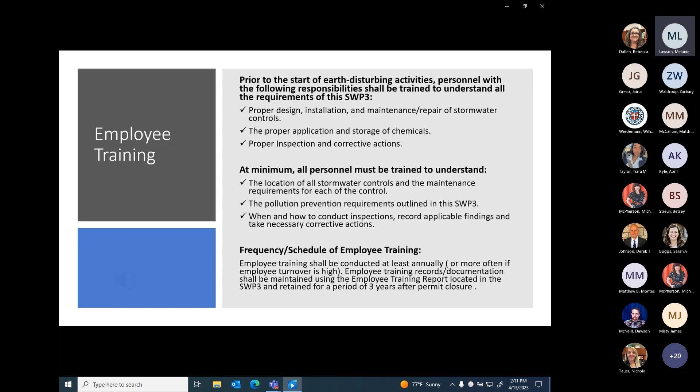Next, let's discuss contractor certification. In the next couple of slides, we'll talk about the contractor certification form and how it's used to ensure that all parties outside of the permit holder will be responsible to adhere to the SWIP.

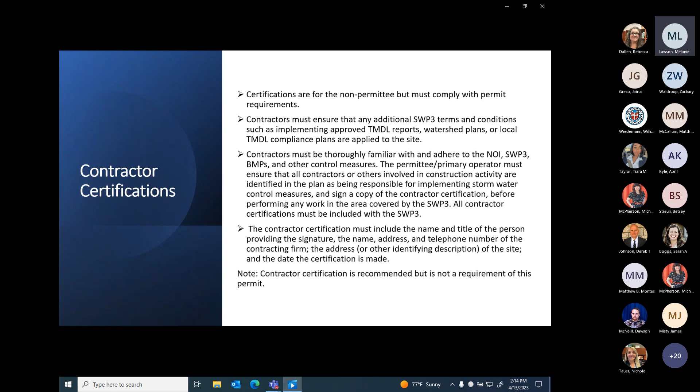Now that we've gotten through employee training and contractor certifications, let's get into completing a site inspection report.

Performing regular site inspections comprises not only inspecting your job site to ensure permit and SWIP compliance, but also checking all job-specific documentation and ensuring that it's up to date with the current site conditions. Doing so will help mitigate and correct any potential flaws in the stormwater controls, the job site itself, and your documents.

The inspection report is designed to be customized according to the BMPs and conditions at your site. To make your site inspection easier, you should bring a copy of your site plan and number all the stormwater BMPs and areas of your site that will be inspected. A brief description of the BMP or area should then be listed in the site-specific section of the inspection report.

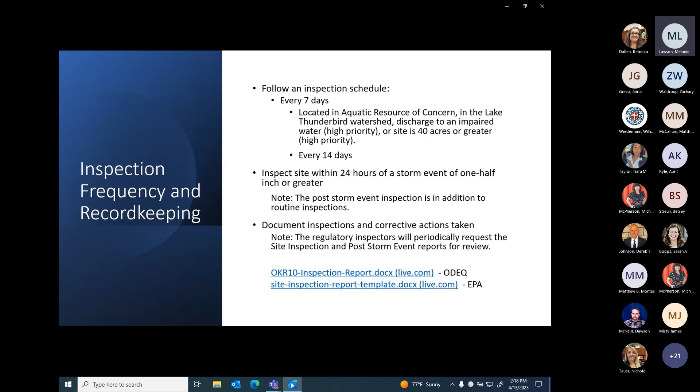Step 1: Completing a site inspection report. When filling out the first step of your site inspection report, please ensure that each blank is filled in correctly and legibly. This is the information you'll need for the general information section: the project name, inspector name and information, inspection frequency, the current weather information, and discharge information. Now let's see how that fits into the form.

Always starting at the top of the form and working your way down will ensure that no blank is missed. The inspection date should always be the date that the inspection was performed. Site inspections can rapidly change, so it's important to keep consistency throughout the inspection process.

Record the complete project name. This is especially important if you have multiple phases of the same project going on at the same time.

The person performing the inspection should list his or her name, phone number, and email address. The email address is especially important in terms of communication because all Oklahoma City stormwater inspectors will be emailing reports and photos of your site directly to your stormwater inspector.

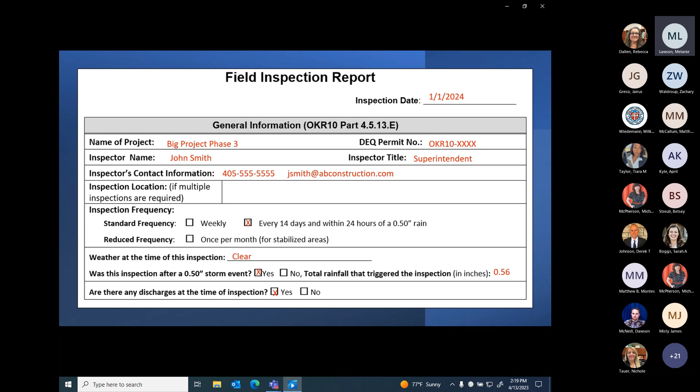General information, key points. Here are some key points to take away from the information thus far. Your site inspections should be conducted in accordance with one of the 2 schedules listed below.

At least once every 7 calendar days for high priority, TMDL, or aquatic resources of concern, or at least once every 14 calendar days. Regardless of which inspection frequency you choose to schedule, an additional stormwater inspection must be performed if a storm event produces half an inch or more precipitation.

The permit holder must specify which inspection schedule he or she will implement in the SWPPP. Remember, post-rain event storm reports are in addition to the routine inspection reports, and always complete all data fields and write legibly.

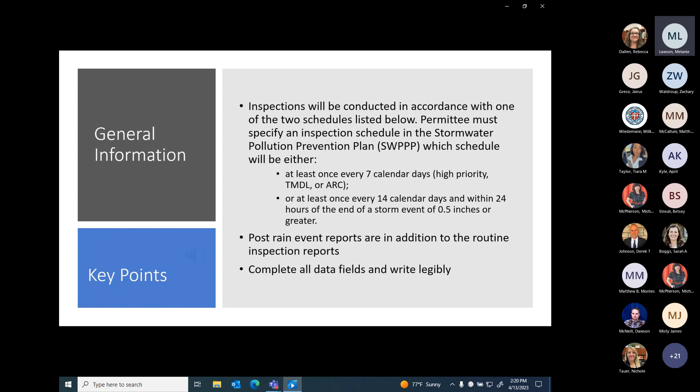Step 2. Completing a site inspection report. Stabilization of exposed soil.

List the areas where soil stabilization is required to begin because construction work in that area has permanently or temporarily stopped. Non-disturbance greater than 14 days, or 7 days for TMDL, high priority, or ARC areas. Also record all areas where stabilization has been implemented.

Soil stabilization is extremely important to be done in a timely manner, as the potential to release large amounts of sediment into the streets, storm drains, and neighboring properties is extremely high, especially with unvegetated slopes.

Vegetation is the absolute best sediment discharge prevention tool at your disposal. It's highly recommended when starting the initial grading process to leave as much natural vegetation as possible. The more rooted vegetation you have, the less sediment discharge you'll have.

These releases may not seem like much at first, but over time they can drastically change the topography of your job site, negatively change the chemistry in water bodies, affect local wildlife, pose challenges to local water treatments, and severely damage the environment. Out of all the potential pollutants during a construction job, sediment is the number one pollutant.

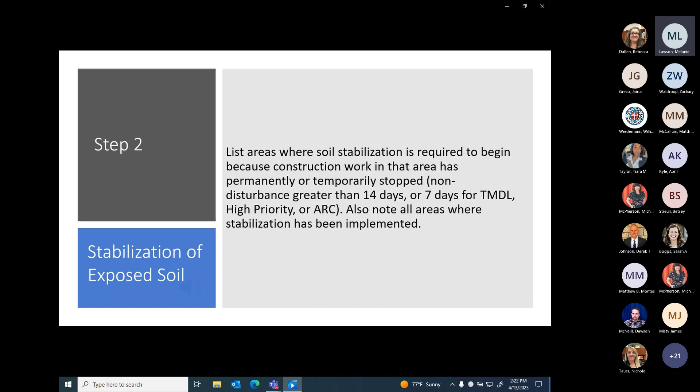This is the form you'll use to record stabilization. For each area where stabilization has been initiated, describe the progress that has been made and what additional actions are necessary to complete stabilization.

Record your stabilization dates of when stabilization will begin, when additional stabilization will occur, and when final stabilization has been achieved.

When major construction activities are complete on a part of the job site and final stabilization for that portion has been documented and completed, inspection frequency may be reduced to monthly in the stabilized area.

Permit holders can amend or add to this section as the areas of the project are finally stabilized. Your site plan should be updated regularly to indicate these changes.

Once you're finished with a project and ready to file for a notice of termination, you must have all bare areas stabilized to 70% uniform coverage of the native background, and all stormwater discharge from construction activity must be eliminated.

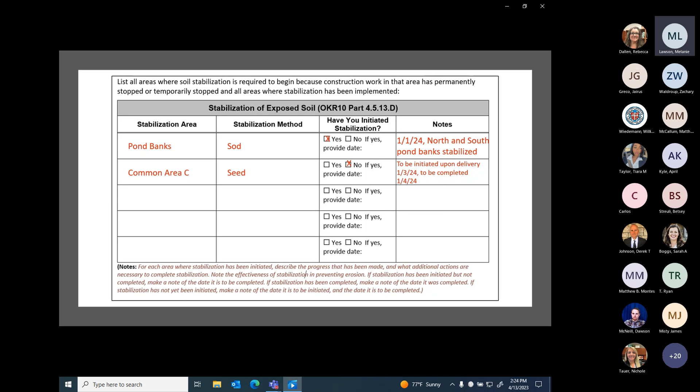Stabilization examples. In the following photos, you can see some temporary and permanent stabilization measures being used. An important note is that all stabilization measures will require regular maintenance until vegetation has been completely established and is root bound.

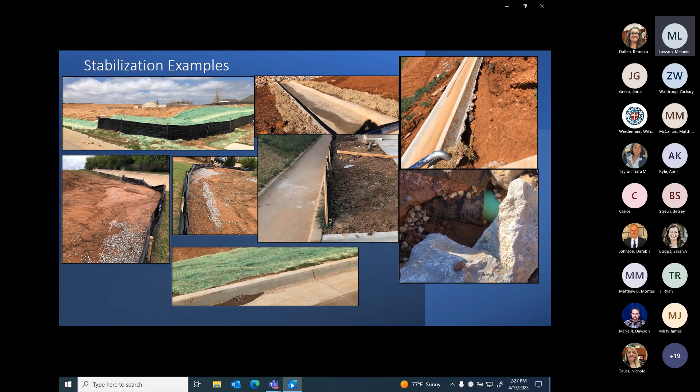Stabilization methods and BMP importance. Key points. Here are some key points to take away thus far. One, be aware of your limits of disturbance. All bare areas that have been graded or disturbed during the project will require vegetative stabilization regardless of property lines or limits of disturbance indicated on the project plans.

Two, implementation and maintenance of controls is required until final stabilization. Three, if seeding, vegetation will have to be established and reach a 70% density. Four, when stabilizing, focus on sloped areas first, as this is a major contributor to soil discharge.

Again, Oklahoma City stormwater will require all disturbed areas, regardless of property lines or limits of disturbance, to be permanently stabilized if it was disturbed during the construction process. Also, if your job site has been stabilized properly and then utilities are installed, it's still the permit holder's responsibility to have those areas stabilized. These will be considered support construction activities for your job site and therefore part of the construction process.

So schedule and speak with your contractors regularly. This is where contractor certifications can come in handy.

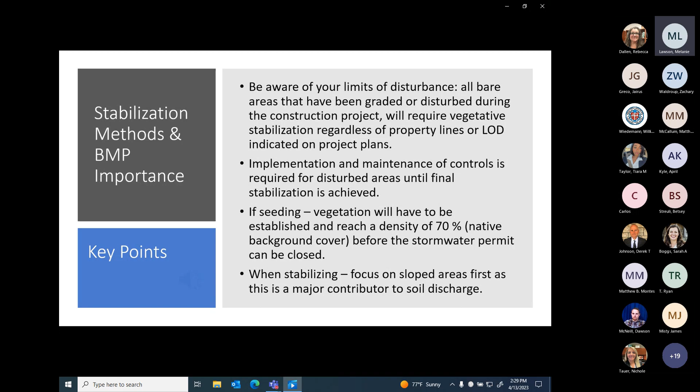Jairus. Now let's move on to step 3 of the site inspection report. In this section of the report, you'll provide a list and description of all structural and non-structural BMPs that are indicated in the SWPPP. You'll identify the location of each control, and during inspection identify whether the controls are installed and operating properly, or if any corrective action is necessary.

You'll provide the date in which the identified condition triggered the need for any maintenance or corrective actions, and in the notes section, describe the specifics about the problem. For this step, you want to take your site erosion control plan and update as needed, depending on what is observed on site. Let's discuss the differences in structural and non-structural controls.

Non-structural BMPs or controls are typically passive or programmatic and tend to be a source control or pollution prevention BMP that reduce pollution in runoff by reducing the opportunity for stormwater runoff to be exposed to the pollutants in the first place. In many circumstances, it may be easier and less costly to prevent the pollutants from entering the drainage system rather than to control them at the end of the pipe.

When used properly, non-structural BMPs can be very effective in controlling pollutants and will greatly reduce the need for structural BMPs. In addition, non-structural BMPs tend to be less costly, easier to design and implement.

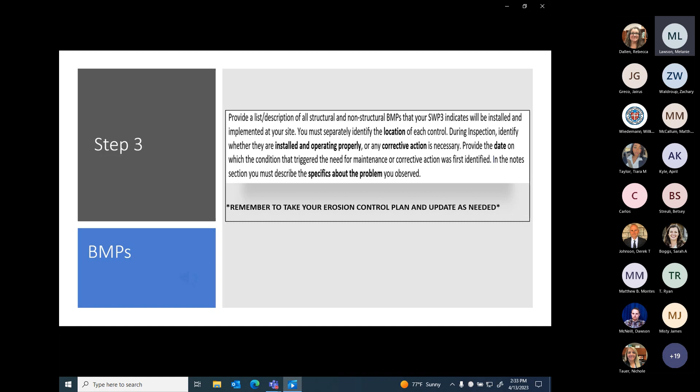Map and erosion control plan. In the previous slide, we mentioned to take your erosion control plan with you during inspection and update it as needed. The erosion control plan should reflect the observed BMPs in place at the site at the time of inspection. It's helpful to number the site BMPs on the erosion control plan to correspond with the site inspection report.

If it's found that the ECP requires updating to add a BMP, simply draw the addition in and date it. The city inspector will periodically check the site erosion control plan to confirm it accurately reflects the BMPs installed on site.

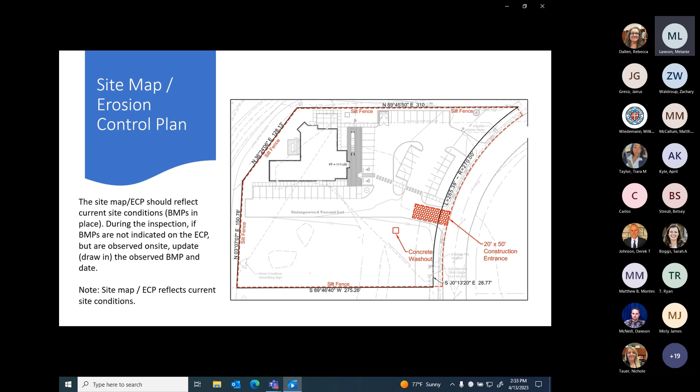The permit does differentiate between conditions requiring repairs and maintenance, and those requiring corrective action. The permit requires maintenance in order to keep controls in an effective operating condition, and requires repairs if controls are not operating as intended. Corrective actions are triggered only for specific, more serious conditions, such as whether a required stormwater control was never installed, was installed incorrectly, or was not installed in accordance with requirements.

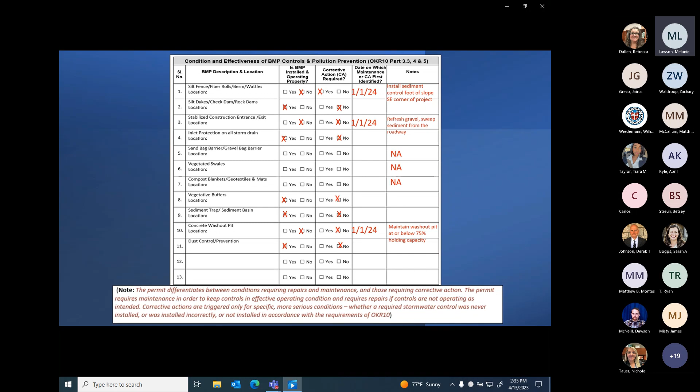BMPs requiring maintenance examples. These are things you might see out in the field while conducting your site inspection report.

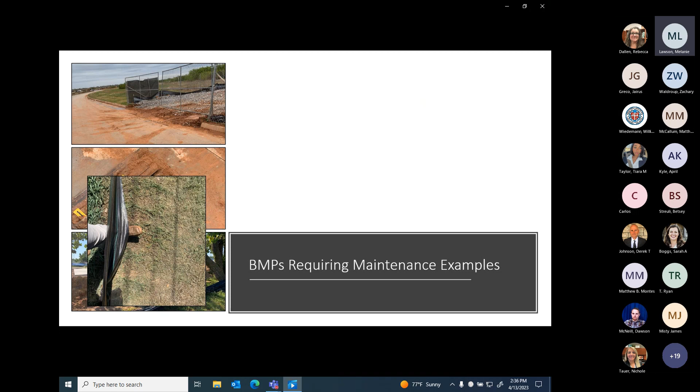In the bottom left, you'll see some silt fence that has fallen down. Often what we find out in the field is silt fence is not trenched in correctly.

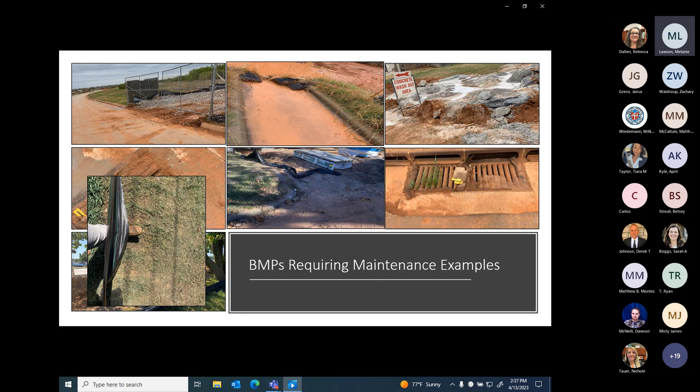Now let's go through some examples of BMPs not requiring maintenance.

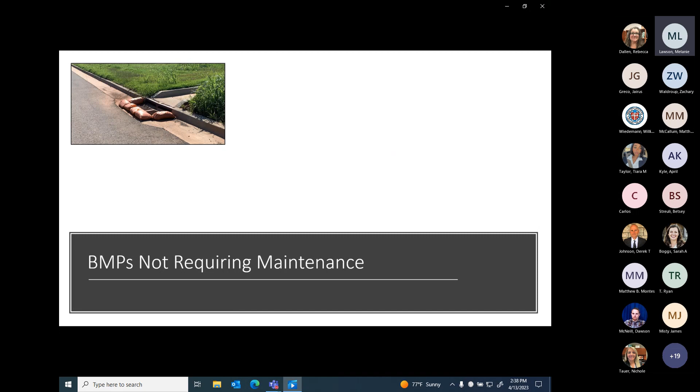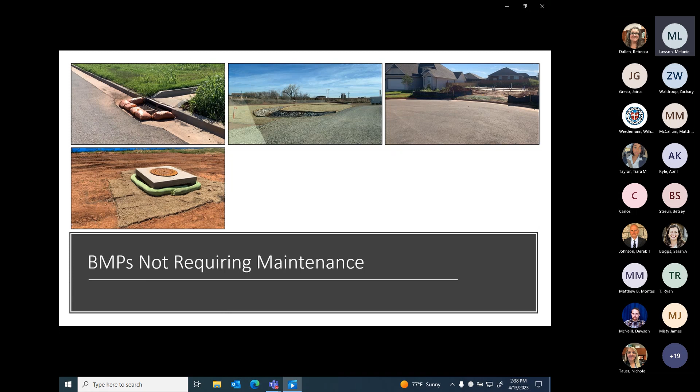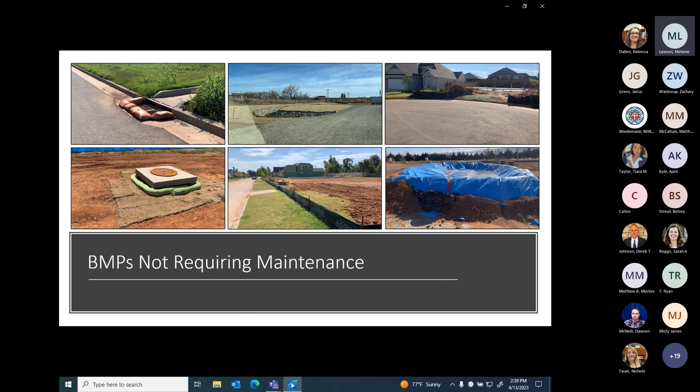BMP key points: Site inspections will verify that all BMPs are implemented, maintained, and effectively operating to minimize erosion, control sediment, and prevent stormwater contamination to the MS4 or the surrounding water bodies.

Note that the permittee shall maintain records of inspections and repairs for a period of at least 3 years after the project is complete and the permit is terminated.

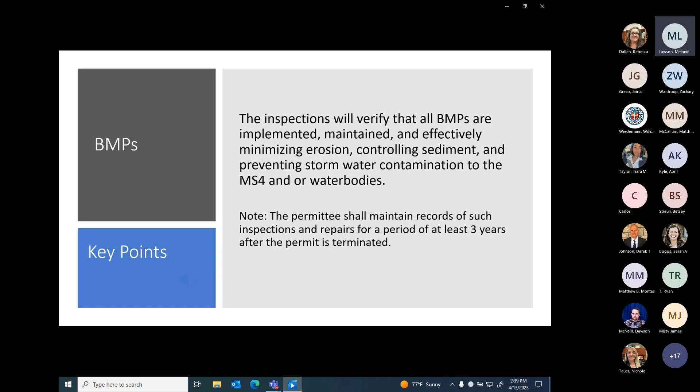Step 4, pollution prevention and waste management. Of the site inspection report, the site inspector will provide responses and possible corrective action descriptions to the pollution prevention and waste management prompt in the far left column.

Let's walk through an example. Is the site free of floatables, litter, and construction debris? No. The action needed here would be to pick up trash throughout the project area.

Are material storage and handling areas, including fueling areas, free of spills and leaks? The response here is yes. If the response is yes, there's no need to document anything in the actions needed column.

Are dumpsters and waste receptacles covered when not in use? The response here is no. If it's no, we're going to provide a reason. The reason here is a cover was not provided. So the corrective action is to use a tarp when the receptacle is not in use.

Has preventative maintenance been conducted on equipment and machinery? Here we say NA because preventative maintenance is not being conducted on machinery and equipment at this site.

Good housekeeping, pollution prevention, and waste management practices, as addressed in this section of the report, is pertinent for each project to maintain stormwater quality permit compliance.

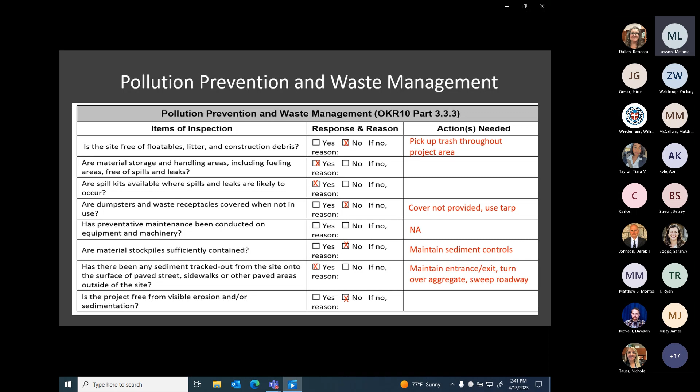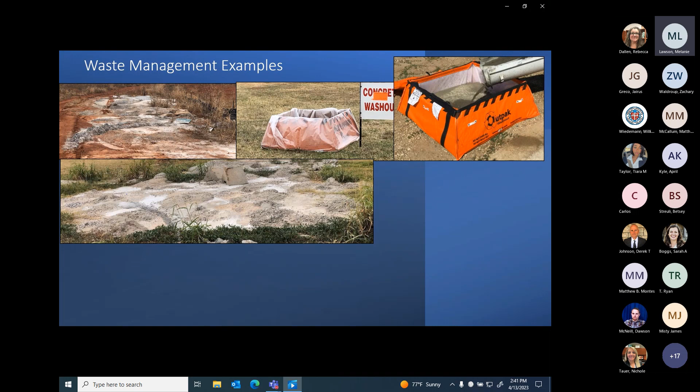Concrete washout is more than just water, rock, and sand. It contains other additives that can shift the overall pH of the mixture to be caustic and can pollute the environment.

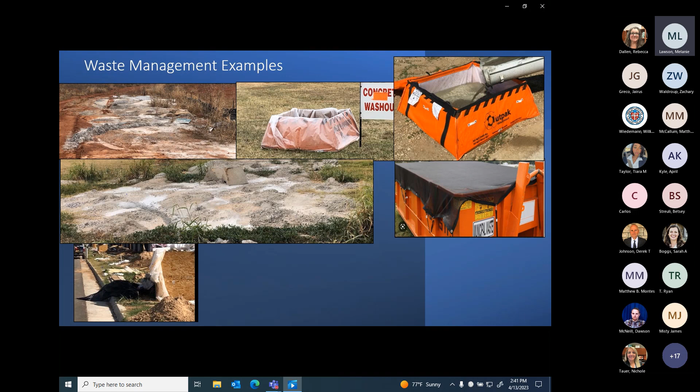Ensure that your portable toilets are properly staked, are in position away from storm inlets and high flow areas, and make sure that your trash receptacles are being covered and emptied regularly.

Pollution prevention and waste management key points. Ensure all chemicals are properly stored in containment or under cover in appropriately labeled containers and that their SDS documents are available for review upon request.

Cover all trash receptacles when they are not in use and empty them regularly. Ensure all concrete washout is directed to a leak-proof container or pit.

Ensure that portable toilets are properly anchored away from stormwater inlets and other high-flow areas. Spill kits should also be available in areas where spills or leaks are likely to occur.

Remember, the permit holder is responsible for all releases of non-stormwater discharges from the job site. So, good housekeeping practices are good pollution prevention practices.

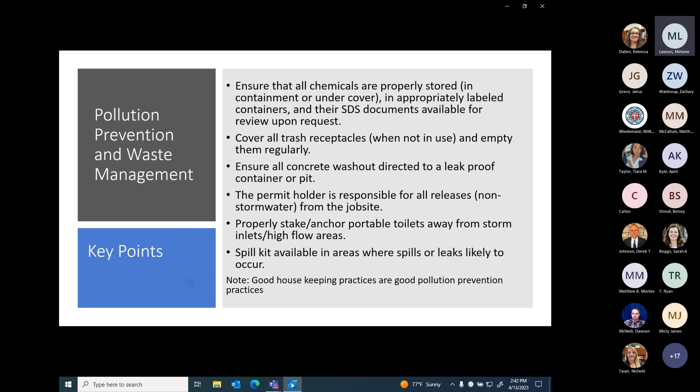Description of discharges. Discharge of stormwater associated with construction activity, as defined in the OKR10 permit, refers to a discharge of pollutants and stormwater runoff from areas where soil disturbing activities, construction material and equipment storage, equipment maintenance, and any other stormwater activity directly related to the construction process are located.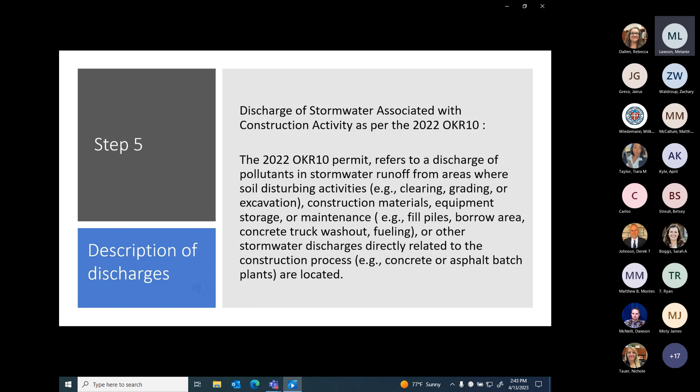The description of discharge section of the site inspection report is to be completed if a discharge is occurring from the site at the time of inspection. Let's walk through this example. The first prompt asks whether stormwater discharge or other discharge was occurring from any part of your site at the time of inspection. If yes, provide the following information for each point of discharge. In our example, the answer is yes.

Number 1 says specify the discharge location. For this example, it was the southeast corner of the project. The next section asks to describe the color of the discharge. Here we indicated that it was dirty and muddy looking, slightly red in color, but it didn't have any foam, odor, or sheen.

If yes, describe, specify the location where the conditions were found and indicate whether modification, maintenance, or corrective action is needed to resolve the issue. In this example, we indicated that we need to install a sediment control on the southeast corner of the project.

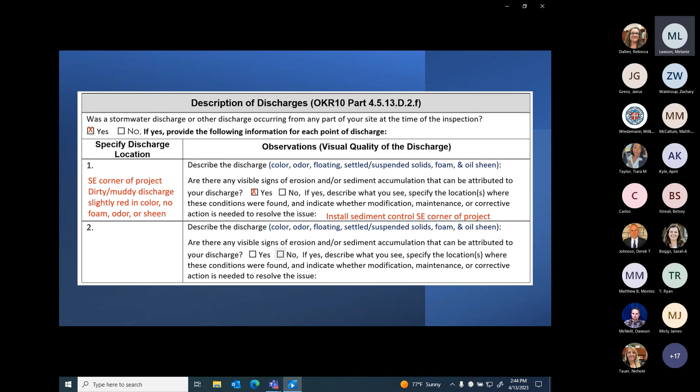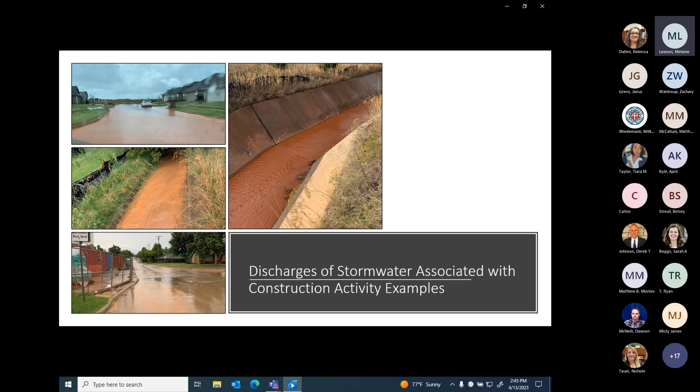Now let's go through some examples of discharges that may occur at your site. Pictured here are examples of sediment discharge off the site into the MS4. The OKR10 describes discharges of pollutants in stormwater runoff from areas where soil disturbing activities, construction material, or equipment storage are located. Any discharges occurring from your site at the time of inspection will need to be noted in the description of discharges section on your site inspection report.

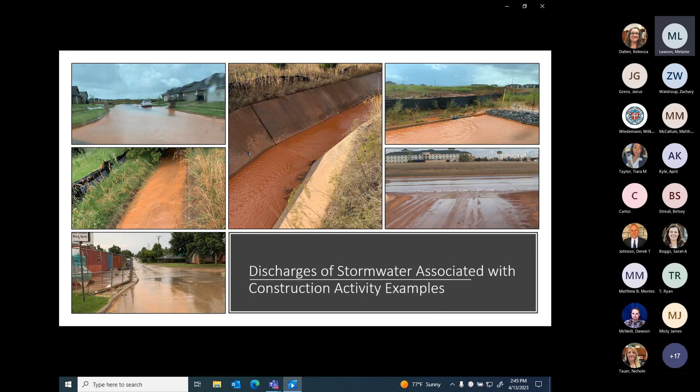This is a common form of discharge related to construction activity. Per the OKR10, you're prohibited from discharging groundwater or accumulated stormwater that is removed from excavations, trenches, foundations, vaults, or other similar points of accumulation associated with construction activity.

These waters must first be effectively managed by an appropriate control. Examples of appropriate controls include, but are not limited to, sediment basins, sediment traps, sediment socks, dewatering tanks, tube settlers, weir tanks, and other filtration systems such as a sand filter, a sediment bag, or some form of passive treatment system that is designed to remove sediment.

Appropriate controls to use downstream of dewatering controls to minimize erosion include, but again are not limited to, vegetated buffers, check dams, and riprap. One of the most common BMPs used for dewatering is the sediment filter bag. These bags should be located on a flat, stabilized, erosion-resistant surface, such as a well-vegetated grassy area, clean stone, or some form of geotextile fabric.

You don't want to place the control on sharp surfaces that may puncture the bag. Do not place the control on steep slopes or within 50 feet of a receiving water body, storm drain inlet, or any form of natural site drainage feature.

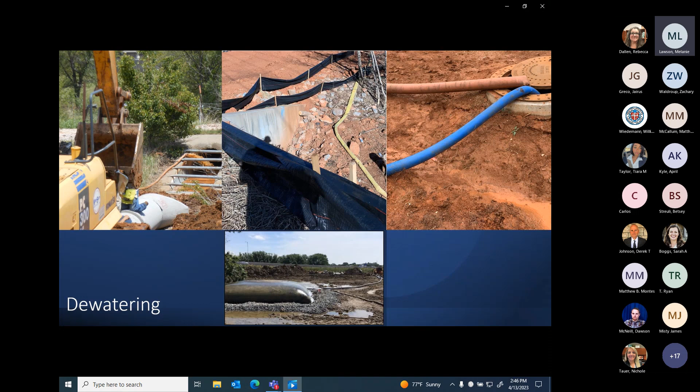Description of discharges, key points: the visual quality of the discharge, including color, odor, floating, settled, or suspended solids, foam, and oil sheen, are all indicators of stormwater pollutants. If these pollutant characteristics are visible in construction site discharge, the pollutants may discharge into receiving waters or other construction or natural site drainage features, such as the MS4.

The purpose of the site inspection report, stormwater quality permit requirements, and BMPs is to ensure that the discharge from the construction site is free from pollutants upon entering the drainage system.

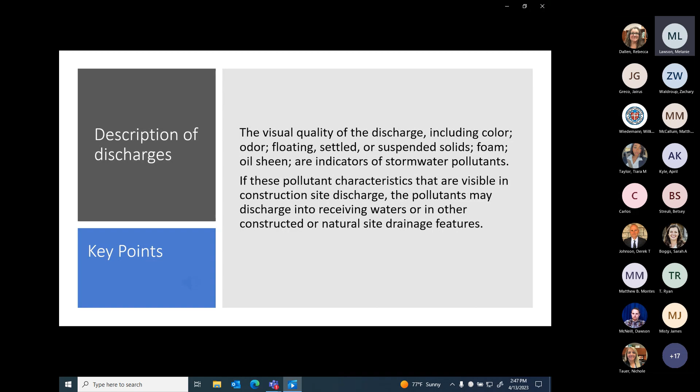Remember, if you don't sign these certifications and document your site inspections, they didn't happen.

Corrective action report. As we briefly discussed back in step 3, the BMP section, a corrective action report is completed when a required control was never installed or was installed incorrectly, a control is not effective enough, a prohibited discharge has or is occurring, or regulators may require corrective action as a result of a permit violation found during an inspection.

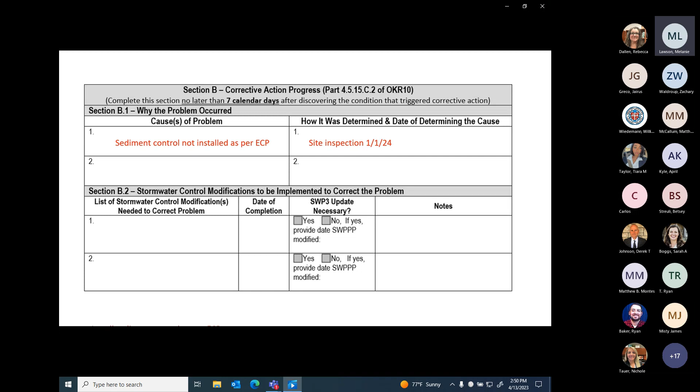The corrective action form is corrective action progress. You will note why the problem occurred, the cause of the problem. In our example here, the sediment control was not installed as per the erosion control plan. You will answer how it was determined and the date of determining the cause. We found this situation during a site inspection on 1/1/2024.

In section B2, stormwater control modifications to be implemented to correct the problem. In number 1, we list the stormwater control modifications that are needed to correct the problem that we identified. In this example, it's going to be to install the sediment control as per the erosion control plan. The date of completion is to be 7 days from our original finding, and there would be no update needed to the SWPPP.